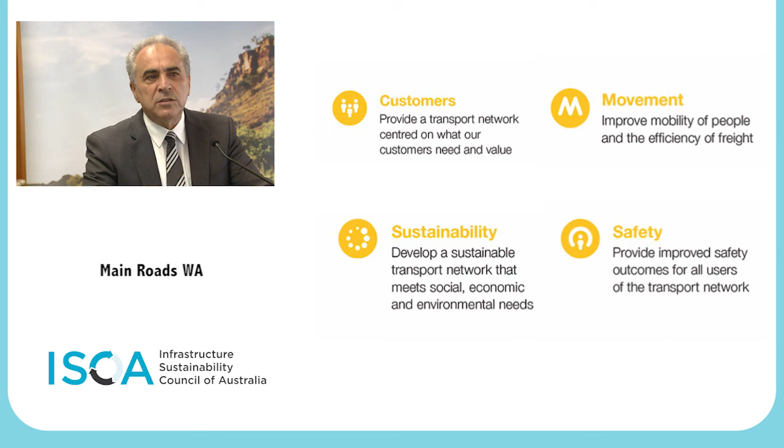Of these key areas, sustainability has been recognised as crucial to achieving the government goal of providing Western Australia with an integrated transport solution in order to create an efficient and user-friendly statewide transport network. Main Roads sustainability policy identifies 6 key priorities designed to support our aspiration and strategic direction.

Sustainable transport: we aim to deliver a road transport system that improves community amenity, mobility, travel choice and ultimately reduces indirect environmental impacts. Climate change.

We strive to develop an appropriate response and adapt to our changing climate. Environmental footprint: we work towards reducing our impact on the natural environment by focusing on emissions, pollution, waste, land use and resources. Behaviour: we want to develop a culture of sustainability within our people, our industry and our community.

Governance and performance: we seek to ensure high standards in governance by measuring and reporting our sustainability performance against our key sustainability aspects. Funding and financing: we look to create opportunities for funding and financing for road infrastructure development and maintenance.

Aligning with key priority 5, governance and performance, Main Roads uses ISCA's Infrastructure Sustainability, or IS rating tool, to verify the level of sustainability achieved in projects. This ensures transparency and accountability for claims made on project outcomes.

Going forward, the use of the IS rating tool will enable Main Roads to maintain and enhance its reputation for sustainability, which is important for our social licence to operate. It will help benchmark projects for sustainability against other projects from across Australia and assist in the process to allow technical standards to change. For Main Roads, IS is a way to understand how our projects are performing against sustainability principles.

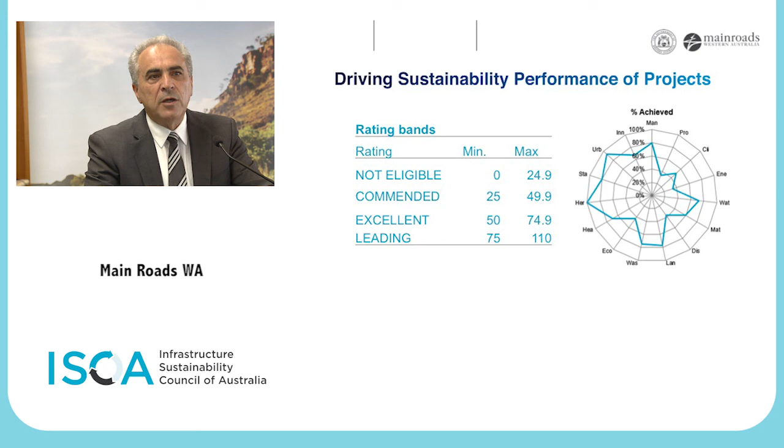Additionally, IS is a platform for reporting on project sustainability in a way that can be directly linked to both annual and sustainability reports. Main Roads is actively involved in the many working groups set up by ISCA to inform tool development. This helps us keep up to date with the changes and progress in sustainability practice and contributes to the overall direction of the tool itself.

The IS tool also provides Main Roads with a lessons learnt platform, which is easily transferred from project to project and provides an efficiency benefit. It analyses the approach various projects have taken with certain processes, opening the door for innovation and process improvements.

Main Roads applies the IS tool either internally or self-assessed for projects valued between $20 and $100 million, or formally for projects valued at more than $100 million.

2 projects have achieved ratings to date, Gateway WA and the City East Alliance, which was the first as-built rating achieved in Australia. 5 additional project ratings have been registered and another project is undergoing registration.

The Gateway WA Perth Airport and Freight Access Project is a $1 billion road construction project funded by the state and federal governments and designed to improve the safety and efficiency of one of WA's most important transport interchanges. It will provide a first impression for residents and visitors to Western Australia for years to come.

The following short video outlines Main Road's commitment to sustainability throughout the Gateway WA project.

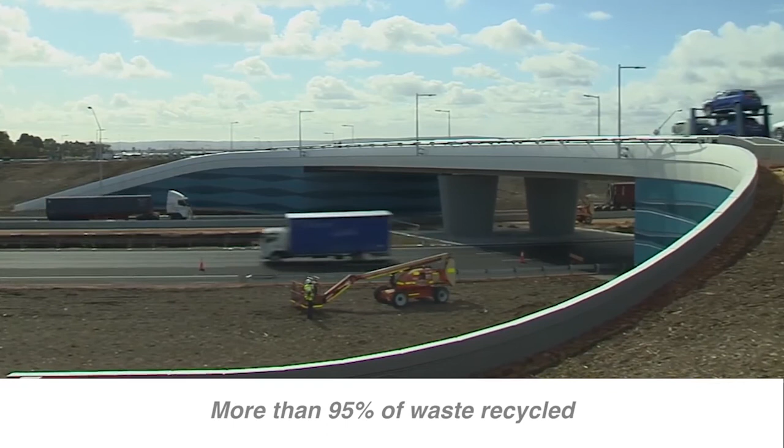A number of key milestones were achieved in order to meet the sustainability objectives. More than 95% of the construction waste sent off-site was recycled.

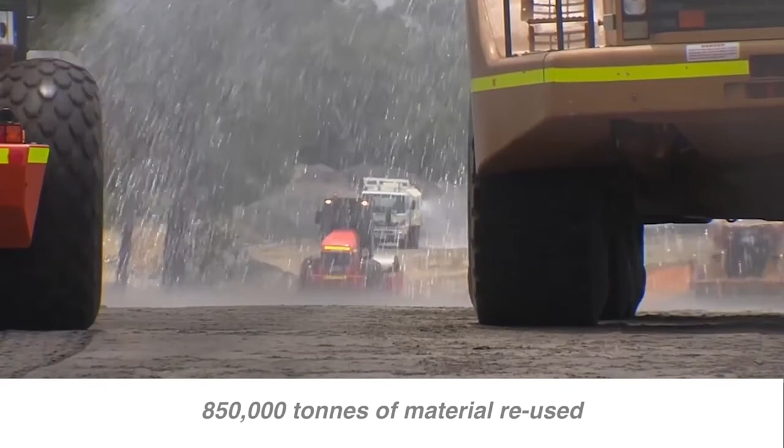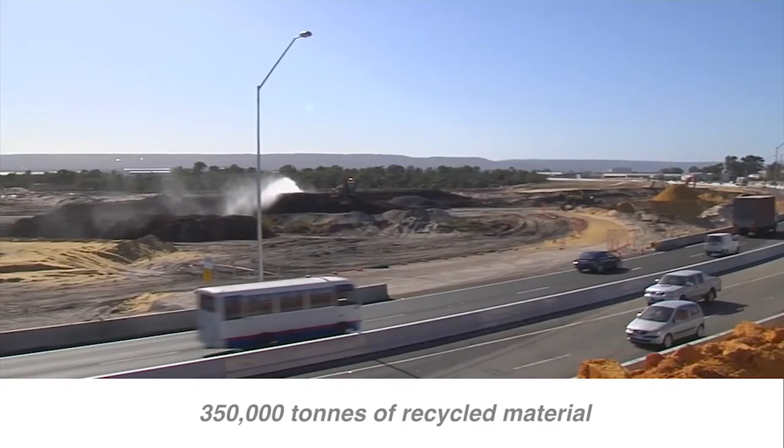850,000 tonnes of unsuitable material from Gateway WA and other Perth projects was processed on-site and reused, instead of being sent to landfill. Another 350,000 tonnes of recycled material was brought in and used. Overall, almost 30% of materials brought to site were recycled.

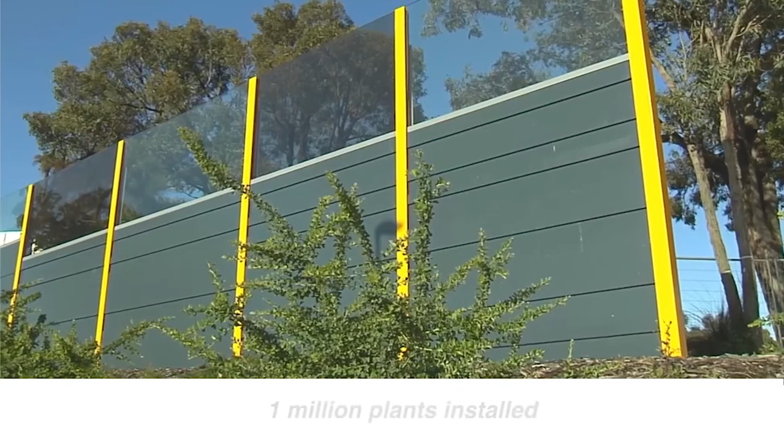This is enough to fill two-thirds of Domain Stadium, and was then used as fill under the road and for the 1 million plants on the project. Environmental impacts were reduced by relocating animals and minimising clearing of mature trees.

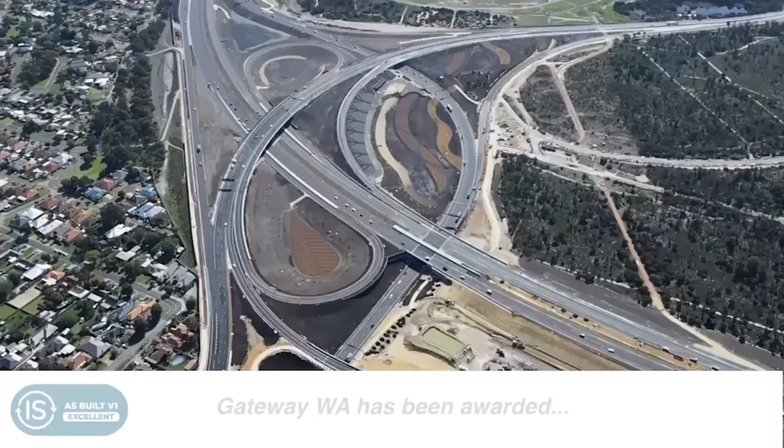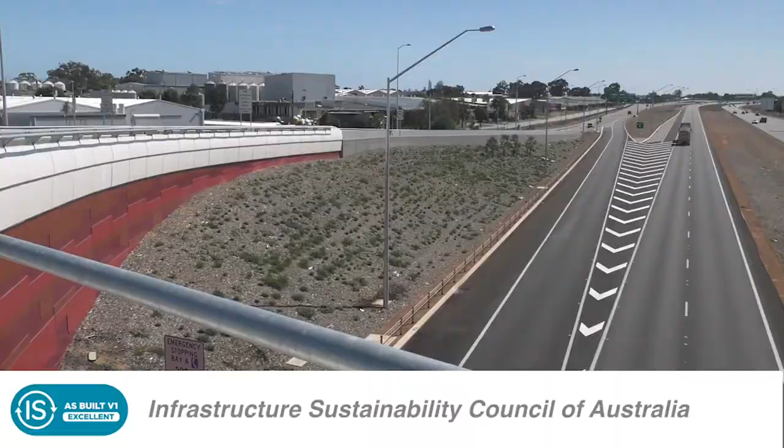Main Roads' commitment to sustainability has been recognised by Gateway WA being awarded an Excellent As Built Infrastructure Sustainability rating by the Infrastructure Sustainability Council of Australia. The sustainability rating for the Gateway WA project is the second highest sustainability rating for a constructed project in Australia to date.

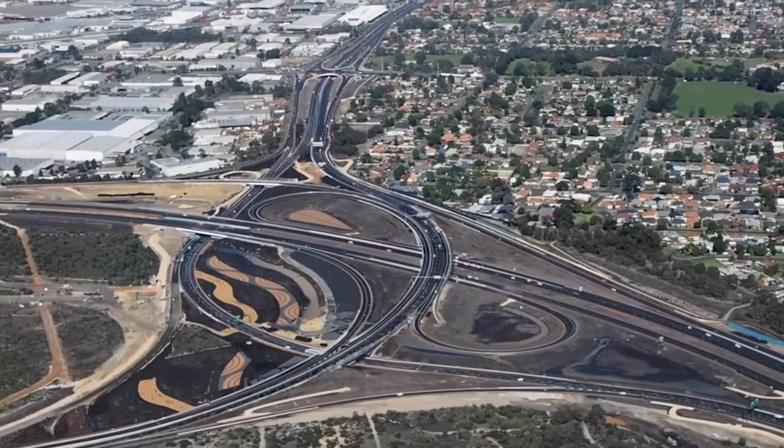The Mitchell Freeway extension north to Hester Avenue in Clarkson is a $261 million project that will deliver improved transport efficiencies in Perth's far northern suburbs. It will ease congestion on local roads, improve traffic flow and stimulate investment to enhance the development of the area, particularly the Neerabup industrial area.

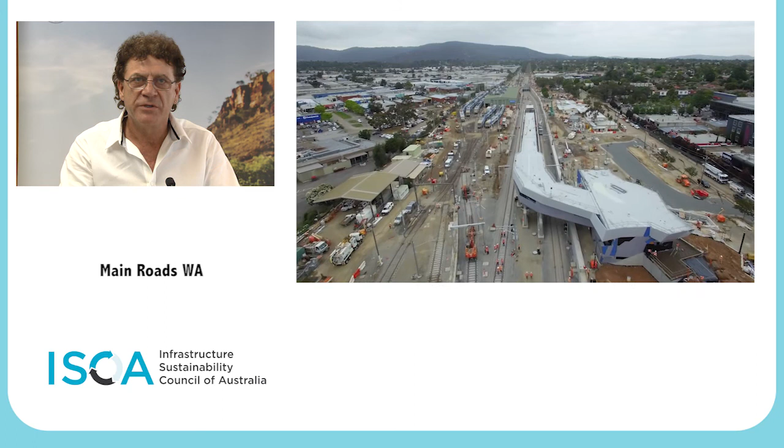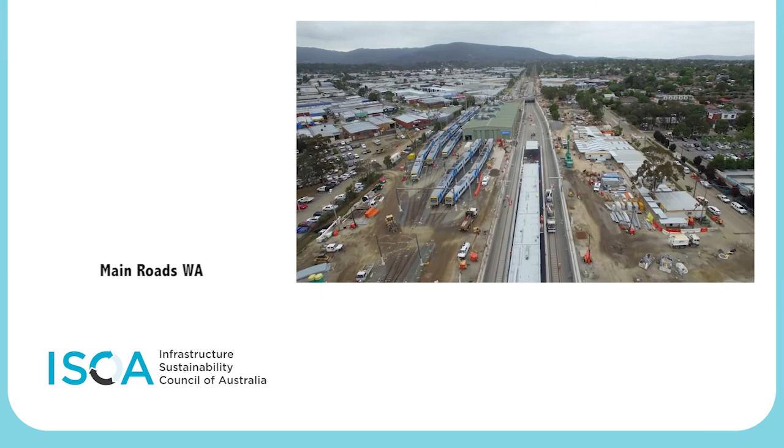The project is incorporating sustainability by using energy-efficient streetlights and trialling cold-applied plastic for road line marking. Both will reduce carbon emissions from the infrastructure life cycle. The project is also continuing Main Roads' recent success in using recycled waste materials in construction through the trial of crushed recycled glass.

Northlink WA is a state and federally funded $1.02 billion transport initiative that seeks to deliver a transport corridor to Perth's northeast that can accommodate the predicted growth in regional freight task to the state's northwest, as well as accommodate urban traffic demand up until 2050.

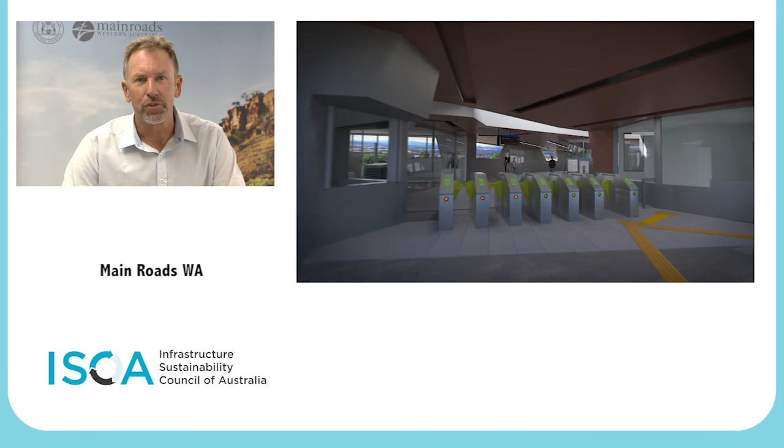The IS tool was employed early in the project development phase to enable sustainability practices to be implemented throughout the project life cycle. This has led Main Roads to trial a number of new innovations on Northlink aimed at creating a more sustainable transport system. Examples include the use of grade-separated roundabout-style interchanges.

This will be a first for Western Australia and a world first for use with large combination vehicles, such as road trains that we have here in Western Australia.

We've also adopted a wider shared path arrangement to encourage active transport. The principal shared path will be 4 metres wide all the way up to Muchea, in recognition that things like technological changes with electric bikes will likely see an increased number of cyclists in coming years.

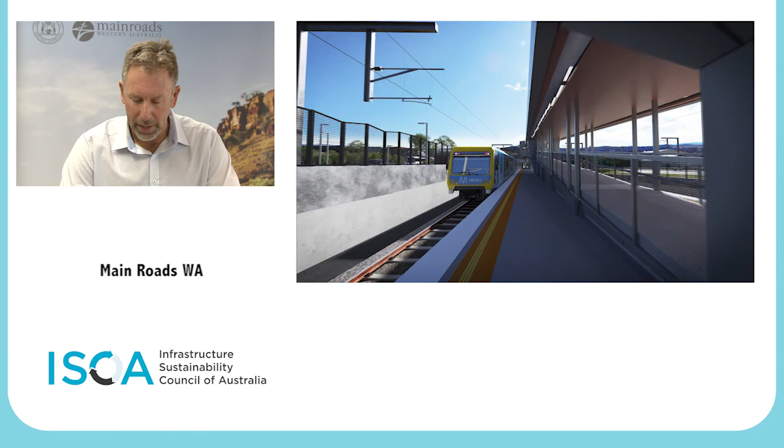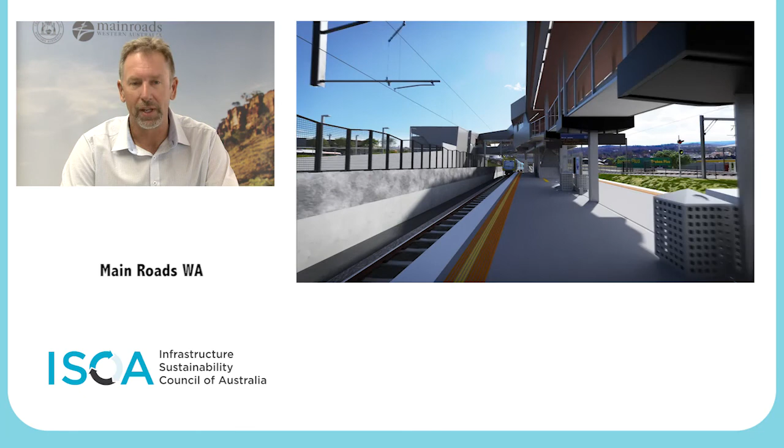We're also trialling initiatives such as adaptive lighting, aimed at better controlling the power to our lighting to reduce both energy consumption and to increase the life of lamps.

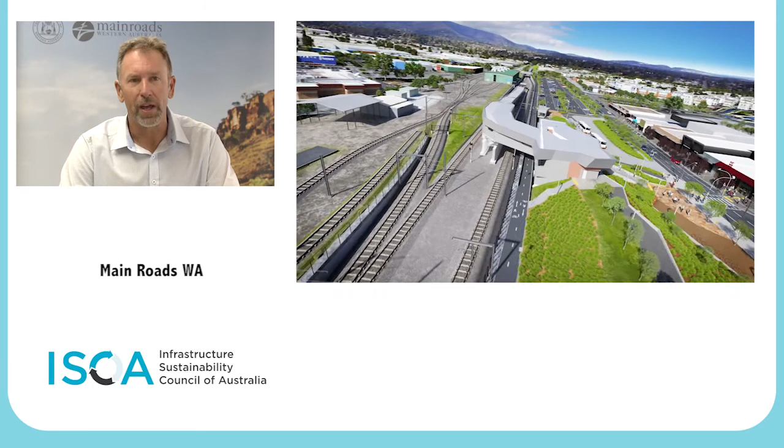We're also trialling new asphalt pavement mixes using stiffer bitumens, all aimed at reducing the pavement thickness and the amount of materials used.

So these sorts of innovations came out of the development phase and have been stipulated in our Northlink WA contracts.

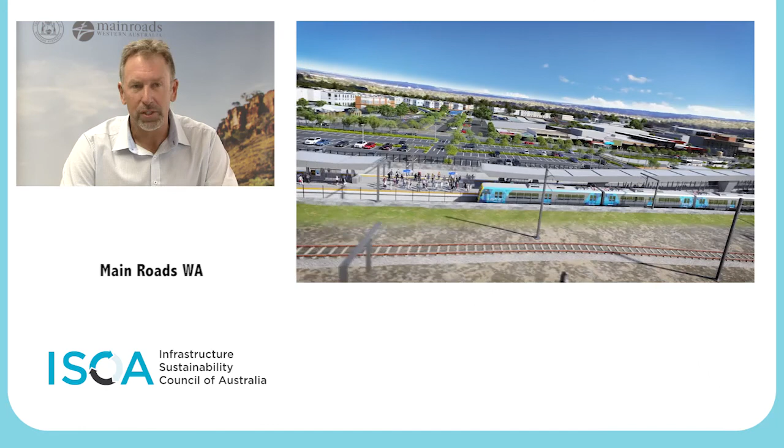In the delivery phase, we're encouraging contractors to maximise the reuse of existing materials on site, as well as to use waste materials from off-site, a good example being the use of recycled asphalt. We also encourage them to use plant and equipment with low energy use and low emissions.

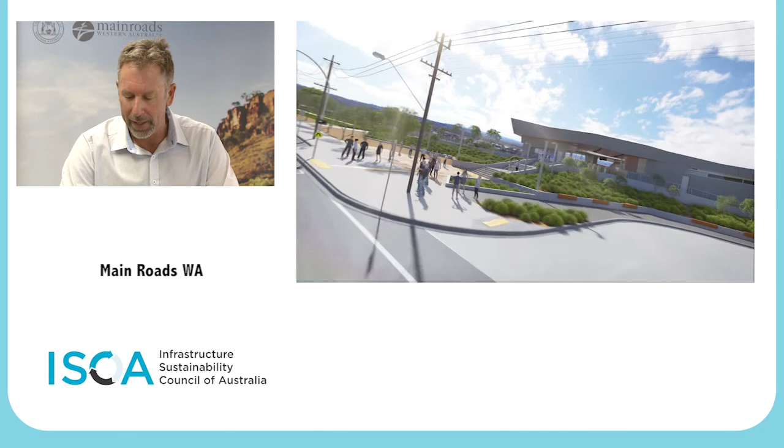Not all of the initiatives are construction focused. Others include application of life cycle assessment tools during the design phase to help optimise decision making around sustainability. We're also sharing our sustainability knowledge with suppliers to increase awareness.

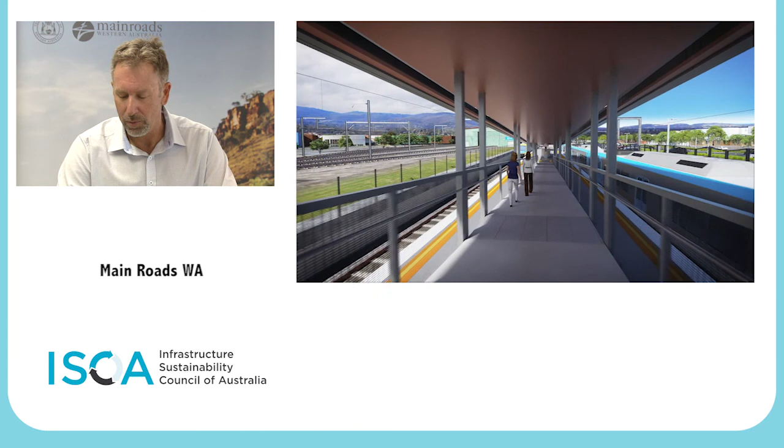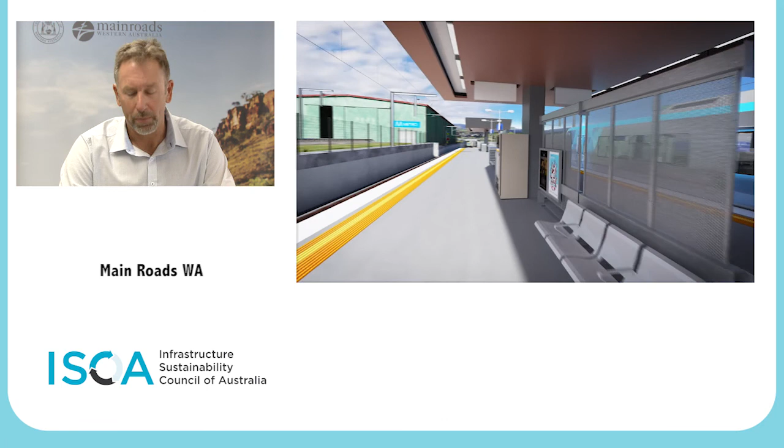Main Roads works actively with our lead contractors, who in turn work with their suppliers. By building sustainability requirements into tenders and also into subcontracts, it promotes sustainable practices throughout the supply chain.

So to finish up, here are some of our top tips for success. Be clear with how your organisation applies infrastructure sustainability. Main Roads has a clear policy for IS and actively works to communicate its sustainability principles to industry and tenderers.

Be ambitious when setting sustainability goals for your project. Throughout the project lifespan, you will find that opportunities present themselves, enabling you to achieve more than you anticipate.

So look, my top tip is to incorporate ideas for sustainability into your project early. You've got to get it into those early development phases. The earlier you do this, the less the costs involved and the greater the benefits.